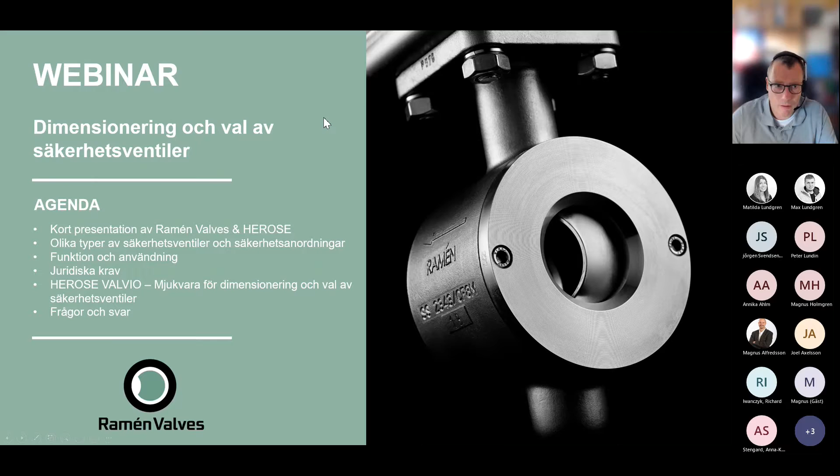Okay, then I suggest we start, not to lose time. Our topic today is safety valves, and to get some more insight, I will have some basics at the beginning, some definitions, and then some recommendations for your daily work and how to proceed with safety valve selection and sizing, and making sure of the correct function.

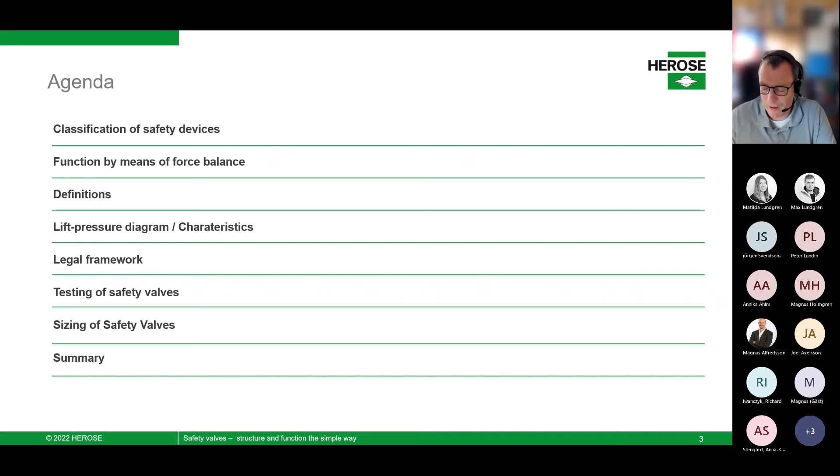The key point is we are talking about safety devices, so every attention paid to a proper selection is able to protect people, to protect expensive equipment, and to keep the plant, the process running. And it's not the investment in the safety valves you're making money with, it's the investment into the processes, and the processes need to run smoothly, and then at the end of the day, it can earn some money for your company.

Classification of safety devices. Here you see an overview of pressure relief equipment, and if we have a look, you have two working principles. You have reclosing devices and non-reclosing devices. Here you see it's quite easy. The rupture disk is the only safety device which is considered non-reclosing.

At the end of the day, if the rupture disk is bursting, you have a big hole in your pressure vessel, and as a consequence, you will lose all the media inside the process, and this can be rather expensive. But a rupture disk in itself is a rather cheap solution to protect equipment, and it can also release rather quickly large flow areas. With the reclosing devices, there are direct loaded devices and controlled devices.

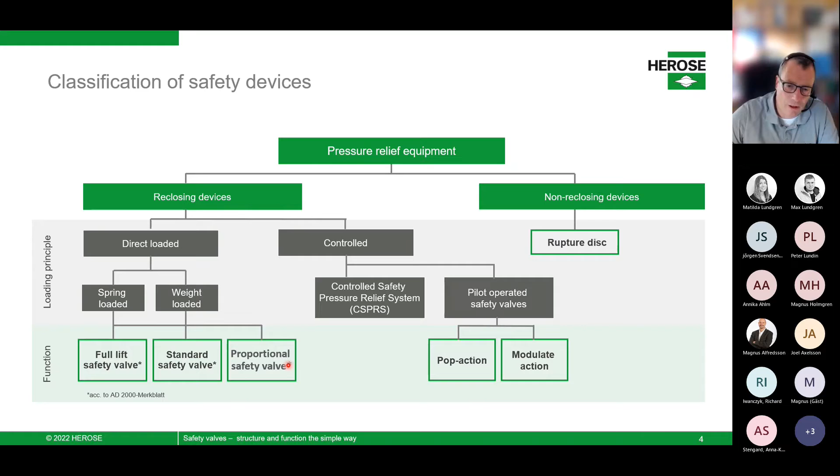Safety valves are then classified independently from the loading principle. You have different functional characteristics: full lift safety valve and proportional safety valve. And here we will talk a little bit more afterwards.

Another basic principle to understand is the principle of work. We have two forces working against each other. One force is created by the pressure in the system and the area of the sealing, so the disk area, and the counteracting force is the spring force, and this of course is created by the spring constant and the compression of the spring. And with the correct compression of the spring at the factory, you define the set pressure of the safety valve.

And I think it's quite simple and straightforward that as long as the pressure force is smaller than the spring force, the safety valve is closed. If the pressure force is exceeding the spring force, the disc starts to open and to lift away from the seat, and is opening the area where the medium can be released into either the atmosphere or to a safe location.

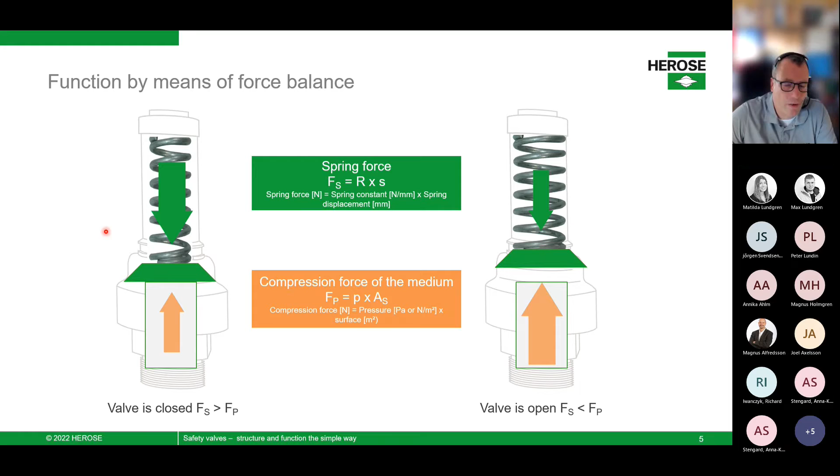For better understanding of the following slides, we need to define some conditions in the working diagrams of the safety valves, and one is the set pressure. Setting the pressure is done by human beings, first of all, and it is done by audible appearance. So when you first time hear the valve whispering or blowing, then this is defined as the set pressure. And I think already here it's quite obvious that double digits behind the decimal is quite difficult to calibrate. We are not talking about digital or electronic devices. It's mechanical parts, and here we already have some limits.

The set pressure in working conditions is specified as the pressure where the valve starts to open, the start of the lift. Opening pressure is the pressure when the valve has fully reached either the necessary lift or the mechanically restricted lift. And at this moment, the valve has the design capacity. So only when the valve is fully open and stable does it have the capacity which is outlined either in the tables on the data sheets or which you can calculate.

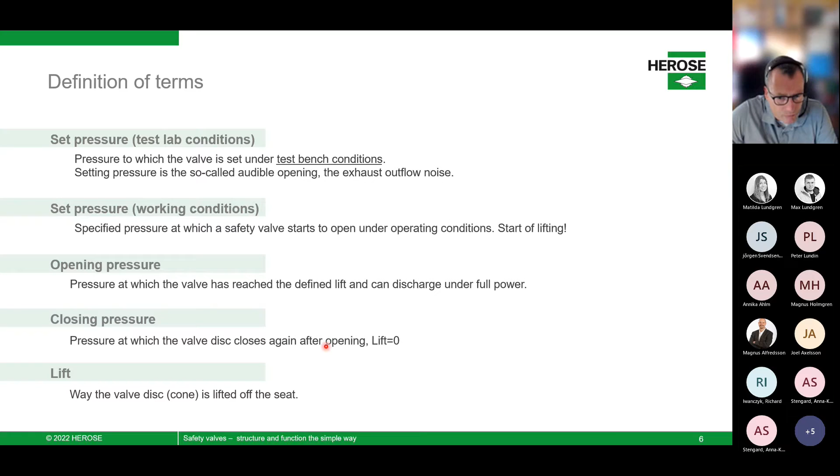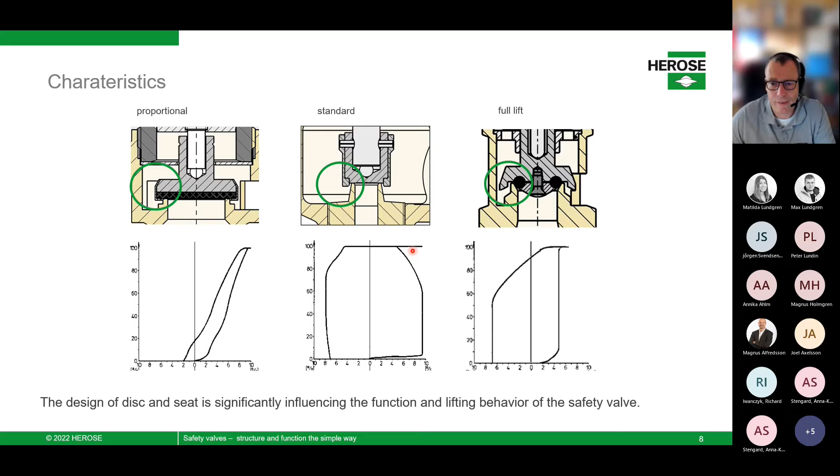If I am too fast or too detailed, please make me somehow aware, and then I will slow down, or if there's any question, please raise them.

Around safety valves, as I mentioned at the beginning, we talk about a safety device which shall protect people, equipment, and the environment. We need to make sure that there is always legal framework around safety valves, and this needs to be observed. And it's not specified in the law, but more in technical rules like the standards we have listed here. So we have two major European standards, and then you also can see the ASME code or the API regulation, which is linked to the oil and gas industry.

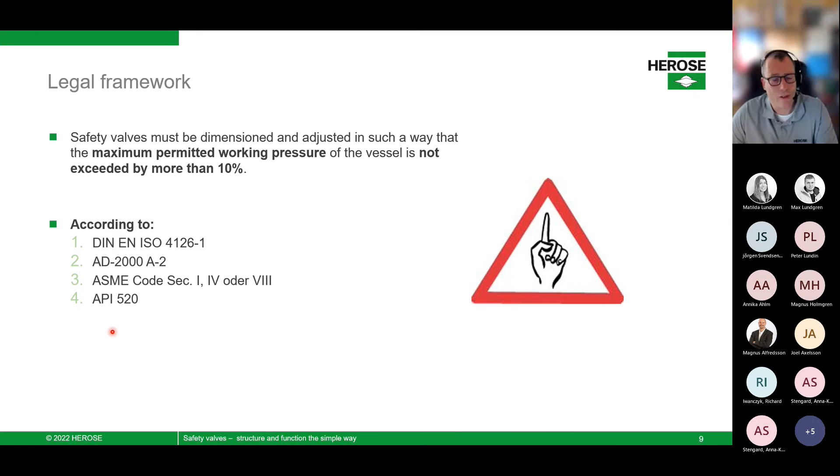But all of these standards and codes require that the safety valve or the safety devices ensure that the maximum allowable working pressure of a vessel is not exceeded by more than 10%. And this is a kind of common rule, and we could continue with Japanese standards, Chinese standards, or Russian standards. It would be always the same. So this is a kind of common rule and understanding.

Based on this, the safety valves have different tolerances for the opening pressure and the closing pressure, but especially these closing pressures are very important values and considerations when it comes to stable operation without a safety valve blowing, and tight safety valves. You need to keep your operating pressure below these closing pressures. This is to avoid untight safety valves, and this is to avoid loss of expensive media and disruptions maybe to the production process.

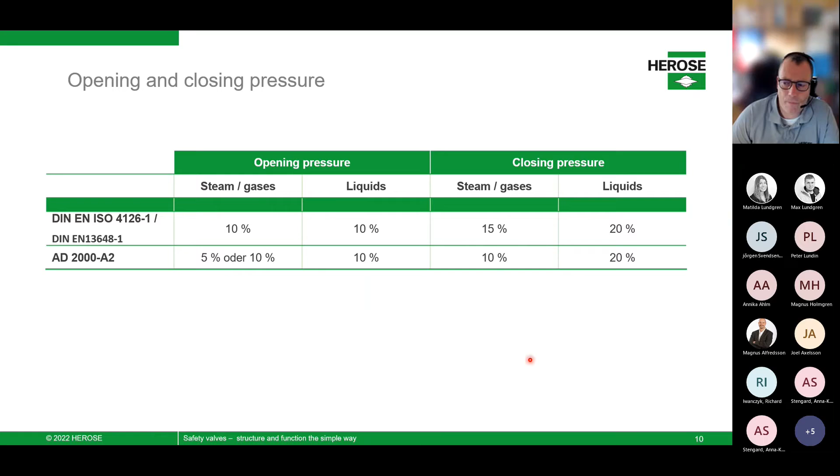So here we have the values again, just to link the values with the diagram. Closing pressure is quite important. This here is an example for steam and gases. On liquids, we can be here at somewhere between 80 and 100%. So the operating pressure needs to be here on liquid systems.

Set pressure is always the design pressure, at maximum the design pressure of the vessel. It can be lower if you don't use the full capacity of the pressure vessel, but it has to be maximum the 100%. And here you see the same tolerances, 10% for the maximum allowable overpressure, -10% for the closing pressure for steam and gases, -20% for the closing pressure for liquids.

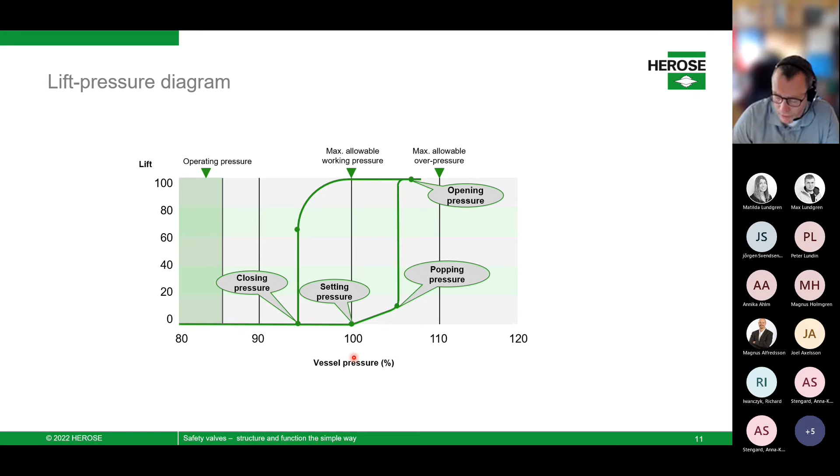So all that I've said until now is independent of the manufacturer. The regulation and the rules are the same for any safety valve manufacturer, including HEROSE. At HEROSE, when you buy a safety valve from us, we do the following testing of such devices, and as we talk about safety devices, certificates are a very important part of the delivery scope.

And during production, we do the following tests, or we have done during development: durability test. Set pressure is of course calibrated at HEROSE. We do a functional testing so that the valve is reaching the maximum lift. Afterwards, we do a seat tightness test according to the standard API 527.

And as HEROSE is supplying valves for the industrial gases industry and other cryogenic applications, and very often we see oxygen as a media, all our safety valves in the cryogenic segment are free from oil and grease as a standard, which is also part of the certification of HEROSE when we supply them.

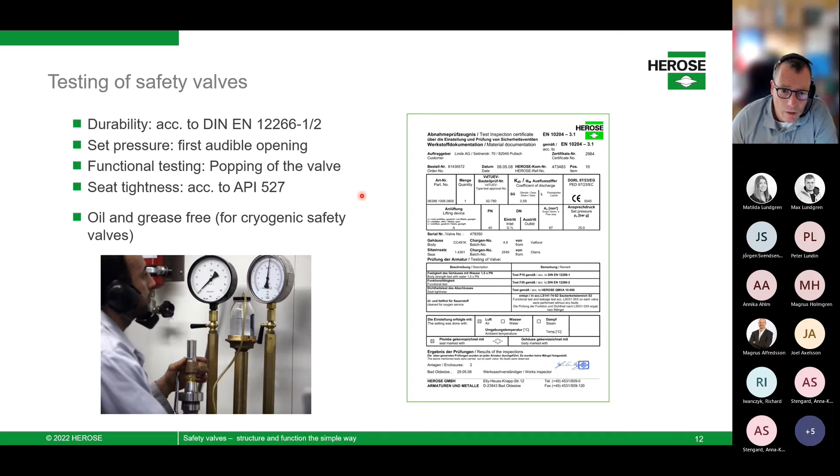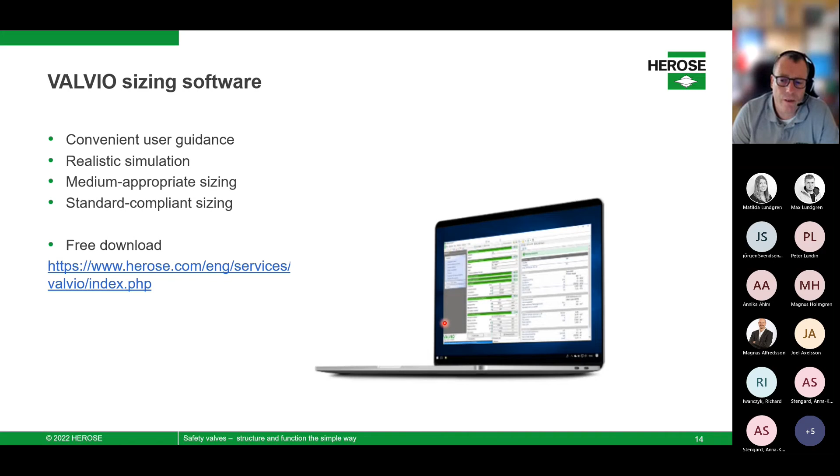That is why you very often see the piping towards a safety valve is rather big, and just before the safety valve it might be reduced to smaller sizes because the safety valve not necessarily needs to be that big. So you may have 2-inch piping to a 1-inch safety valve to avoid the inlet pressure drop exceeding 3% of the set pressure.

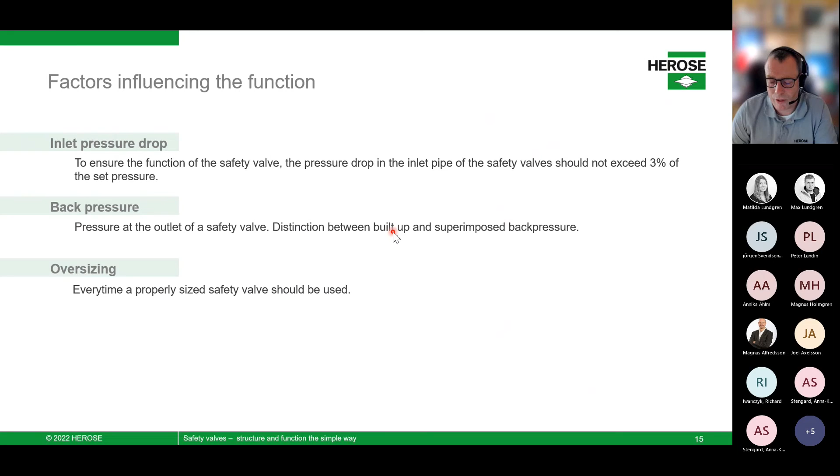Because if the valve is too big, you have a spring, you have a disc, so it's a perfect system to reach the own frequency, and then you can watch the safety valve being destroyed within seconds because of the rapid opening and closing of the safety valve. And first, the valve is destroyed, and second, your equipment is not protected correctly, because when the valve is hammering or chattering, the valve has not the required design capacity, so it does not blow off enough media, and in this moment your equipment is not protected correctly. Yeah, this I mentioned already.

So as a summary, we have different devices of safety valves. Sometimes you see combinations of them. So for example, on the example with the P&ID I've shown you, there are safety valves and bursting discs in parallel with different set pressures. We have different characteristics: proportional, standard, and full lift safety valves, and these different characteristics result in different capacities. And so you have different applications.

Just to give you another example, proportional safety valves are very often used for thermal expansion of trapped liquids. So if you have a pipe segment between two valves, in case of different thermal conditions, you may have overpressure, or you need to avoid vacuum in these piping segments, then a proportional safety valve would be a good solution for the overpressure protection. When you design systems, you need to consider overpressure and closing pressure differences to make sure that the valve and the system or process can work correctly.

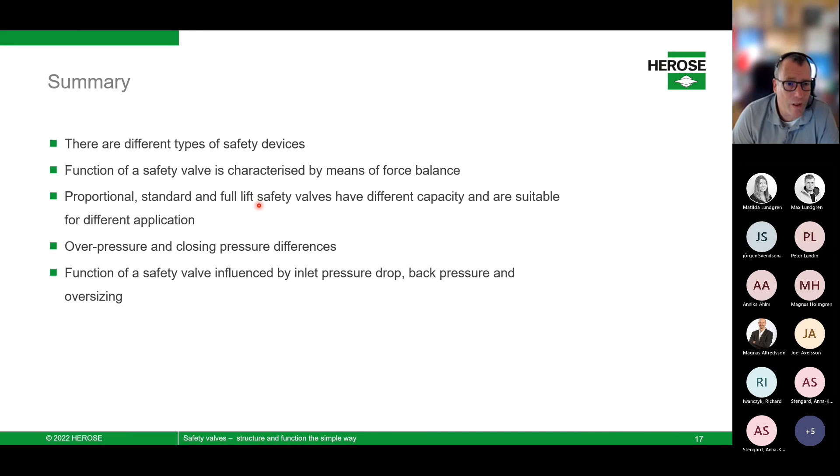And the function of a safety valve is influenced by inlet pressure drop, by the back pressure, and by oversizing. So this brings me to the end of my presentation, and we now have something like 10 minutes for your questions. Thank you very much for the moment.